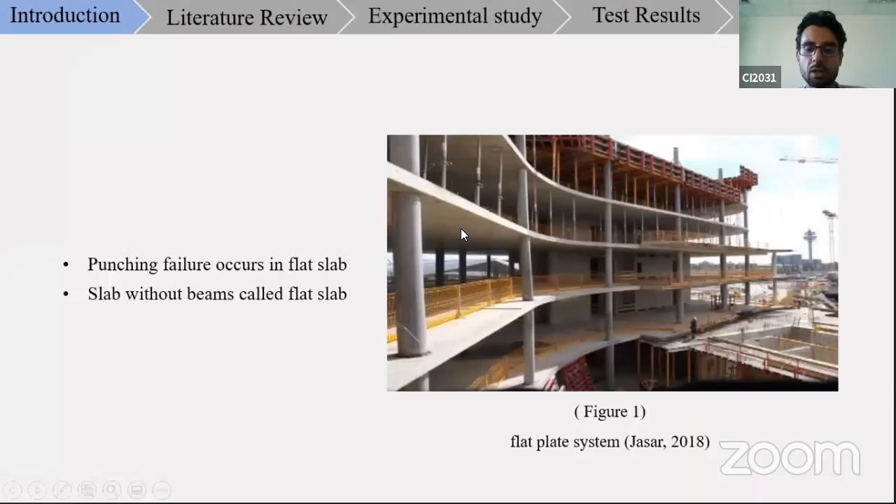Punching failure occurs in flat slabs. Flat slabs are reinforced concrete slabs with uniform thickness, which are directly supported by columns without beams. Recently, flat slabs have become more favorable due to the following advantages. The first one is easy formwork, and reinforcement placement is easy, so it will reduce the period and cost of the construction.

Also it minimizes the ceiling height, which will minimize the overall height of the structure and foundation load, so it will further reduce the relative material cost. It also offers flexibility in room layout because of not having beams and column capitals. Despite this, punching failure is one of the essential risks in flat slabs.

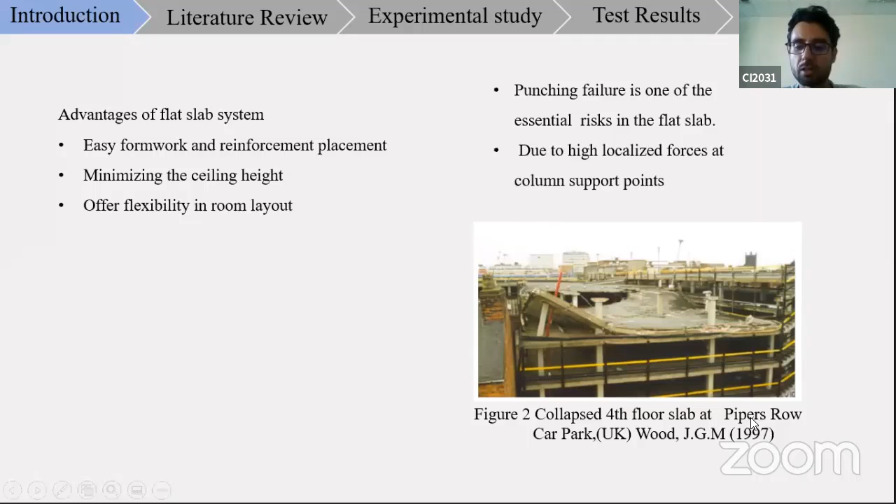Punching failure occurs due to high localized forces at the column support points. It's a catastrophic failure because little or sometimes no warning occurs prior to the failure. As we see in the picture, a disaster occurred in 1997 when the fourth floor collapsed due to punching failure.

Over the past century, much research has been performed to improve punching failure. The first method is increasing the thickness of the slab, but this will increase the load of the structure, which is not favorable. The second method is using various types of reinforcement, such as flexure reinforcement and shear reinforcement. Using shear reinforcement, especially in thin panels, is practically not an easy choice. So recently, researchers are interested in improving the strength of construction materials, such as concrete.

Fibers are the most used material to increase concrete strength. The addition of fibers to the concrete bridges the cracks progressing in the matrix. This behavior continues until the fibers break or pull out from the concrete. As you see, the load deflection behavior of plain and fiber reinforced concrete. Here, a typical concrete member without fibers displays a sudden loss of capacity after cracking. However, fiber reinforced concrete continues to carry load after cracking.

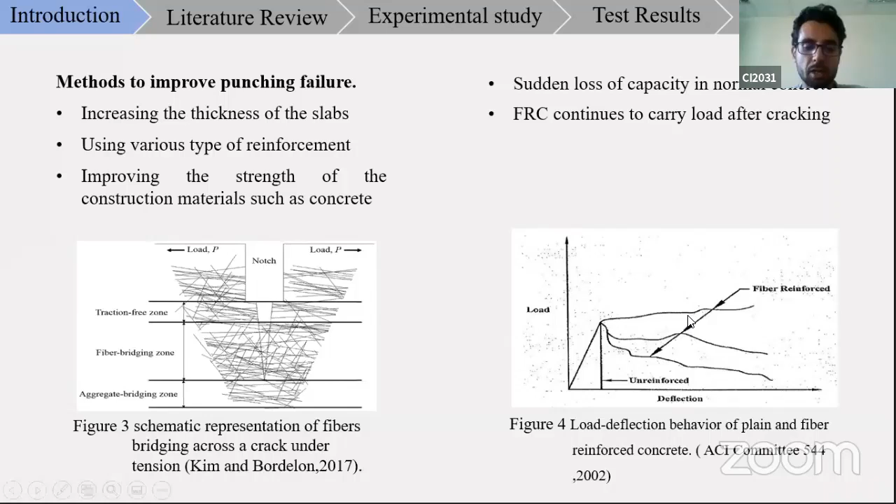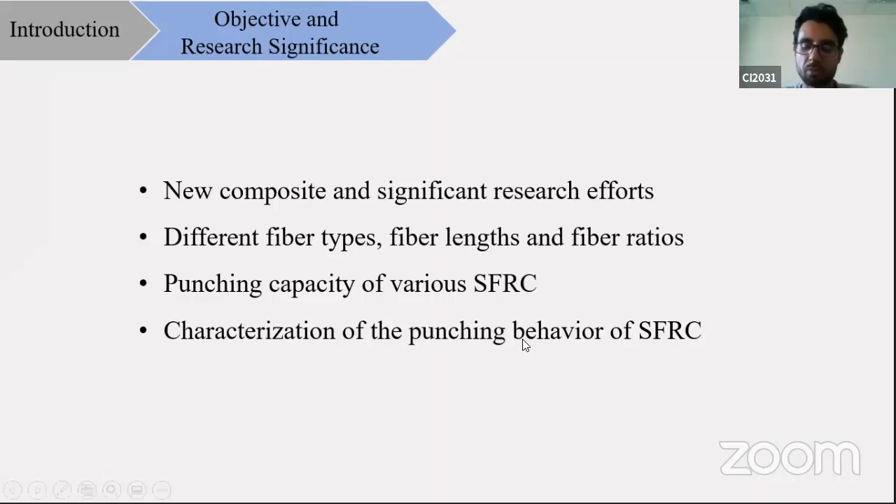The objectives of this study are: first, steel fiber reinforced concrete is a relatively new composite and a significant research effort. Second, the aim of this study is to investigate the punching behavior of steel fiber reinforced concrete in more general terms, focusing on the effects of different types of fibers, fiber length and fiber ratio. Punching capacity of various steel fiber reinforced concretes is investigated. Lastly, the results obtained from this study are expected to contribute to the characterization of the punching behavior of steel fiber reinforced concrete. Now I will present the literature review.

The first one is Gouveia et al. In this study, punching shear capacity of steel fiber reinforced concrete flat slabs is investigated. The slab specimens were cast in octagonal form and tested in a simply supported system as shown here, loaded by a hydraulic jack from the bottom through a steel plate of 200 by 200 millimeters. The load deflection curve is shown here.

They tested 5 specimens. The numbers after the letter F represent the steel fiber ratio, and the number after the letter R represents the flexure reinforcement. As you see here, the load and deflection capacity are higher in steel fiber reinforced concrete specimens compared to the one without steel fiber reinforcement. This shows that fibers give an important contribution to improve the behavior of flat slabs. As the fiber content increases, the load and deformation capacity increase. The maximum increase in steel fiber reinforced concrete was around 54%.

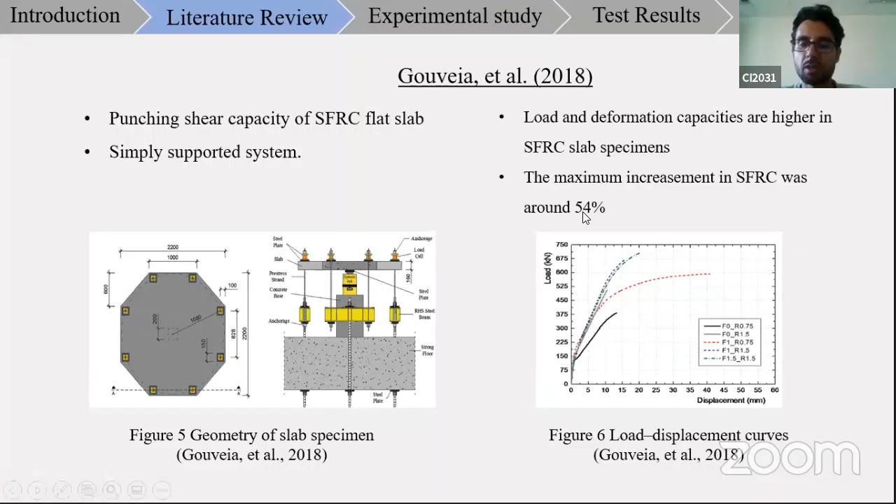The second literature review I will present is Tan and Venkateshwaran. In this study, the punching capacity of steel fiber reinforced concrete slabs without traditional reinforcement was investigated. They tested 12 square slabs with dimensions of 700 by 700 millimeters. The concrete class is shown here, and 2 types of fibers were used. The fiber content ranged from 0.25 to 1%. As shown in the load displacement curve, the type of fibers had marginal influence on the load.

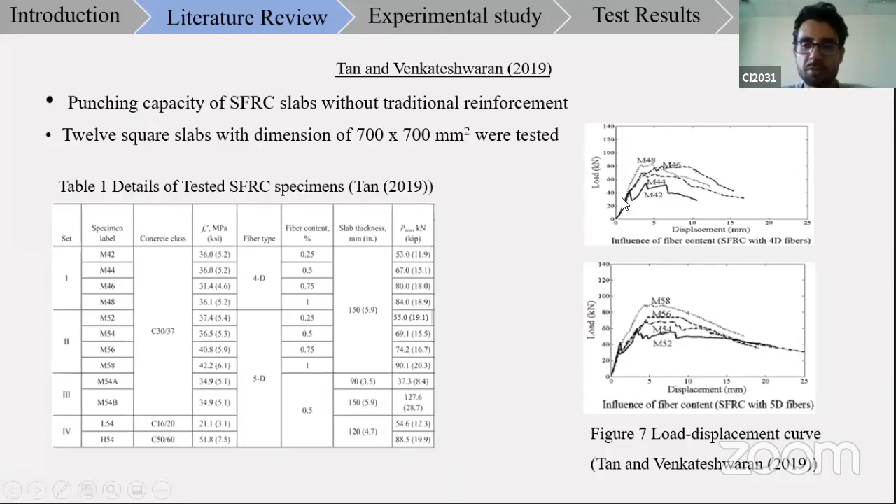Now I will present the experimental studies. In order to determine an appropriate slab specimen thickness for the final test, a trial study was carried out. In this study, 2 slab specimens were cast and tested with dimensions of 170 by 170 centimeters, and thickness of 5 centimeters and 7 centimeters. A steel fiber type of Dramix with aspect ratio of 60 and length of 80 millimeters was used, and steel fiber content was 0.5% by volume of concrete.

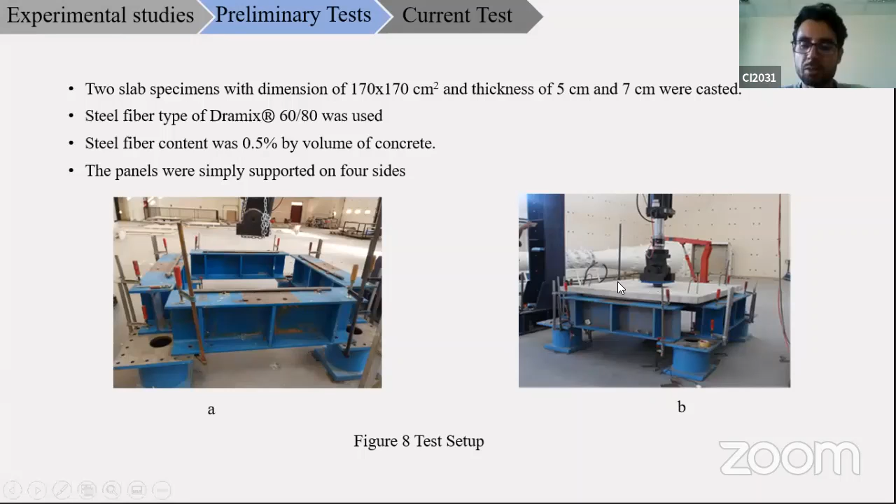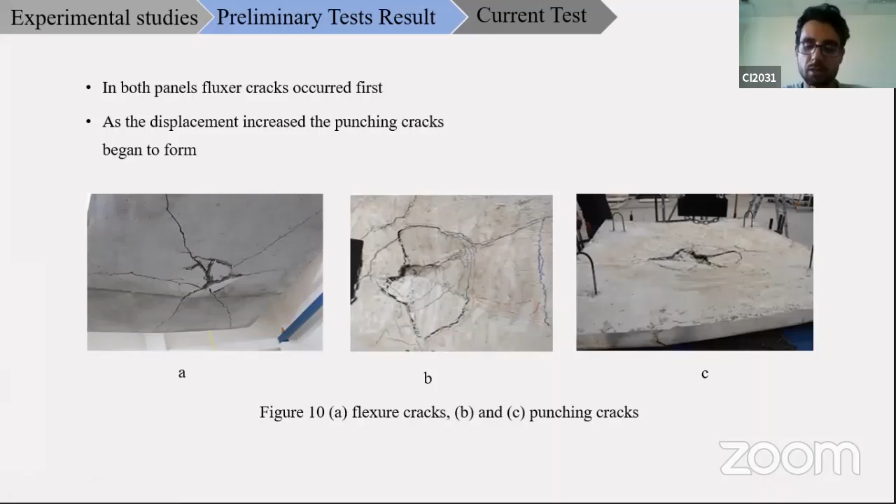As we see, the maximum strength achieved in both panels occurred long after the initial cracks, and displayed a very ductile behavior. If these panels without traditional reinforcement did not have steel fiber, they would be expected to collapse with the first crack. So as mentioned before, the trial study aim was to define the thinnest possible panel without losing its strength and behavior. So it was decided that the 50 millimeter thickness specimen would be appropriate for the final test.

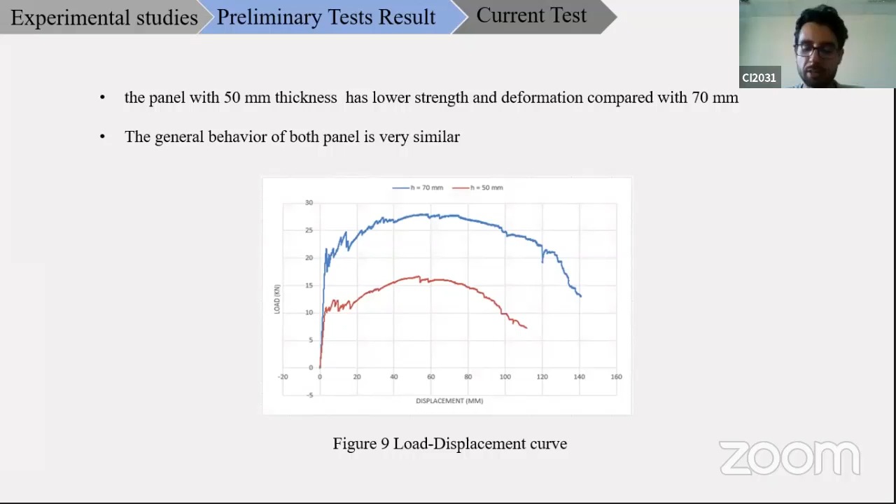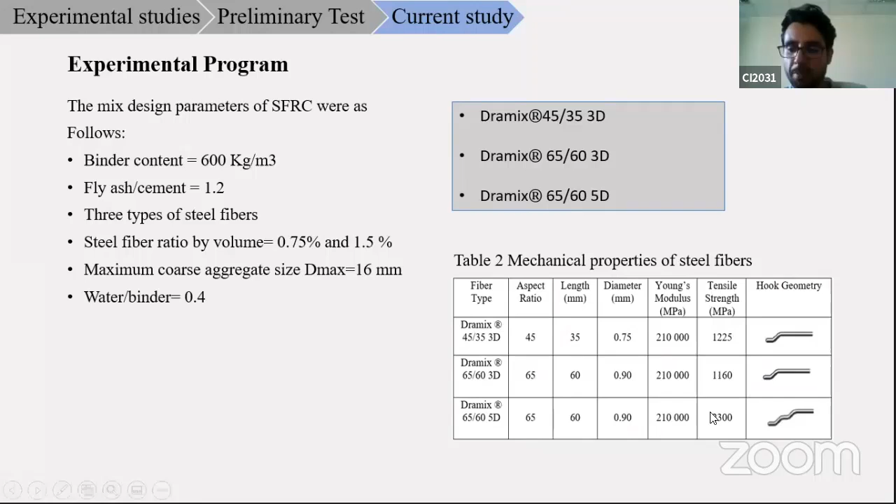Now I will present the current study. The mix design parameters are shown here. The fly ash to cement ratio is 1.2. Three types of steel fiber were used: Dramix with aspect ratio of 45 and a length of 35, 3D; Dramix with length of 60, 3D; and Dramix with length of 60, 5D. Here, the 3D represents single hooked geometry, and the 5D represents the double hooked geometry.

Here, the mixtures are named according to their content as follows. SF represents the steel fiber, then the type of steel fiber, the steel fiber ratio by percentage, and the reinforcement. Two specimens were cast with normal concrete without steel fiber, one specimen was cast with reinforcement with steel fiber volume content of 0.75%, one with fiber volume of 1.25%, and the other was cast with 0.75%.

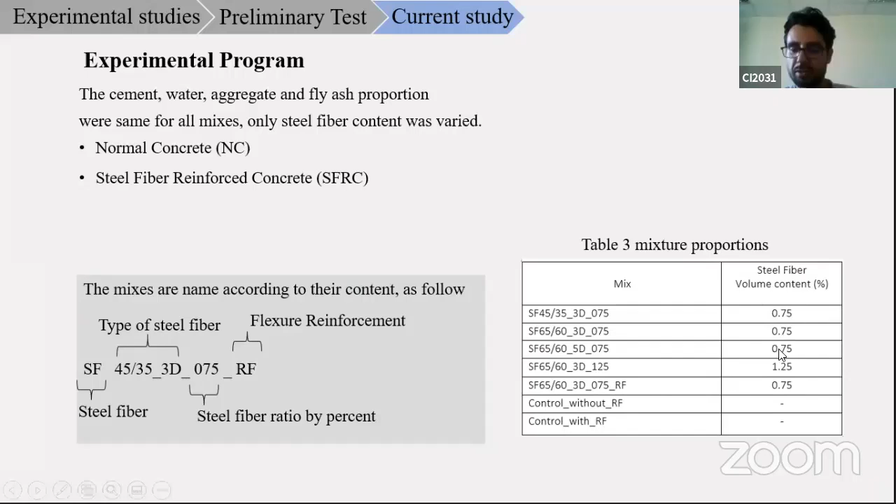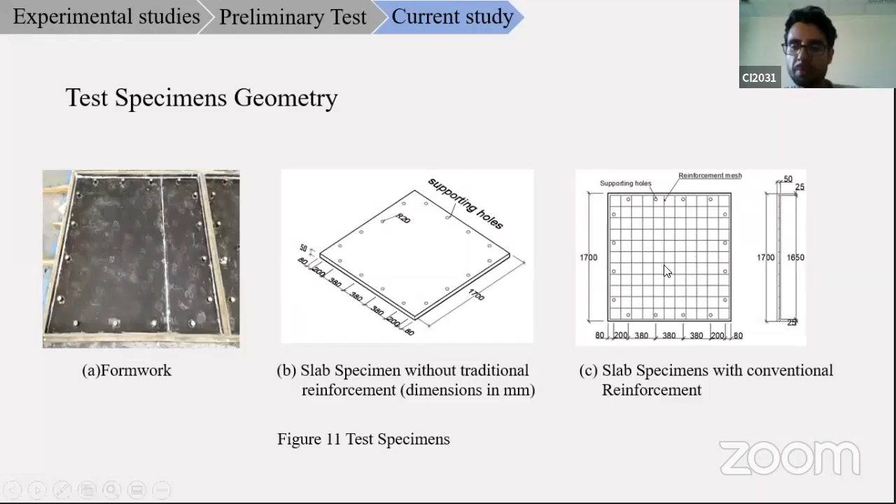The test geometry was adapted according to the trial studies. Just the supporting system was changed. Supporting holes were provided, and these holes were considered in the formwork. The slab specimen with the conventional reinforcement is shown here, and the reinforcement was in the form of mesh. For the test setup, a simply supported system was used. It was provided with a spherical washer, so it can only rotate, but horizontal movement was prevented.

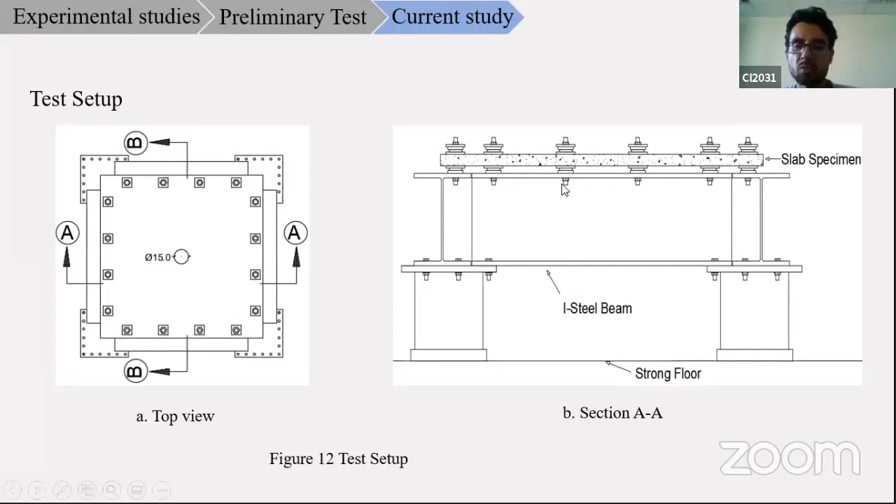Again, a hydraulic load machine was used to load the specimen at the midpoint, and the load was applied at a speed of 0.025 millimeters per minute through a steel plate of 150 millimeter diameter. A load cell was used to measure the load, and a displacement transducer was used to measure the vertical displacement. Here we see the data acquisition system used to collect the data.

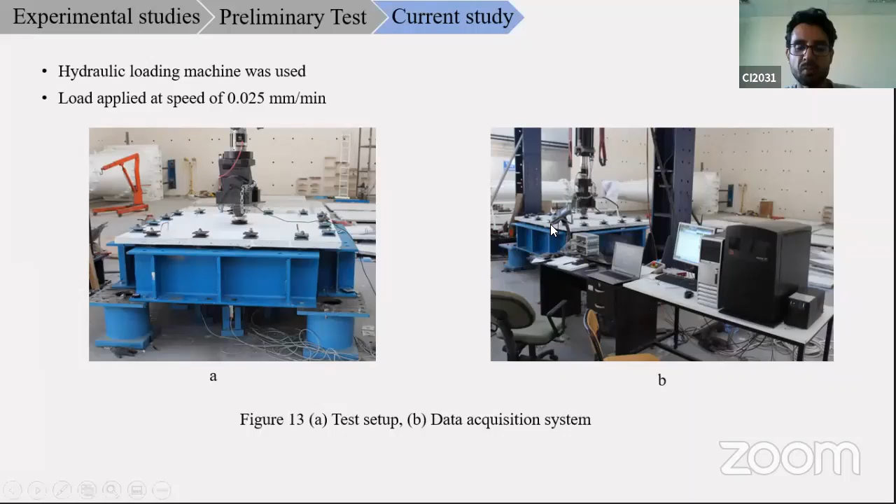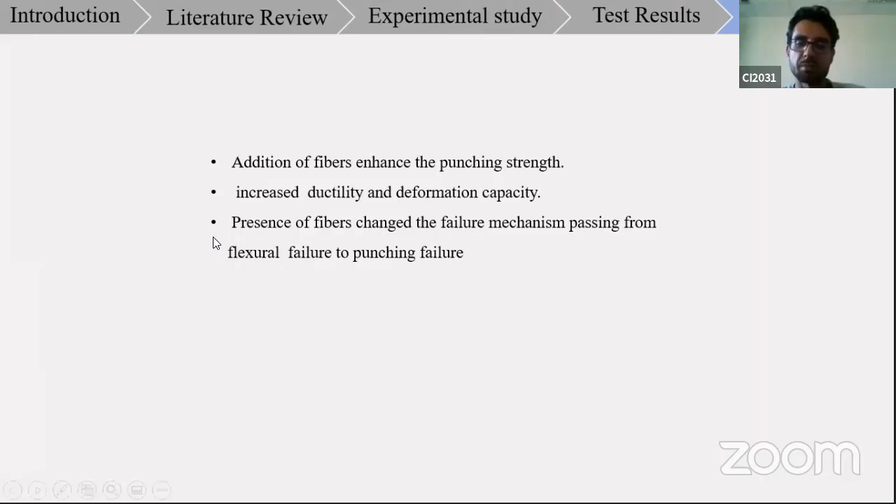Unfortunately, we don't have results of the current studies yet. So I will conclude my presentation. As we saw in the literature review and trial study, added fibers enhance the punching strength of flat slabs, and also increase the ductility and deformation capacity. The presence of fiber changes the failure mechanism, passing from flexure failure to punching failure.